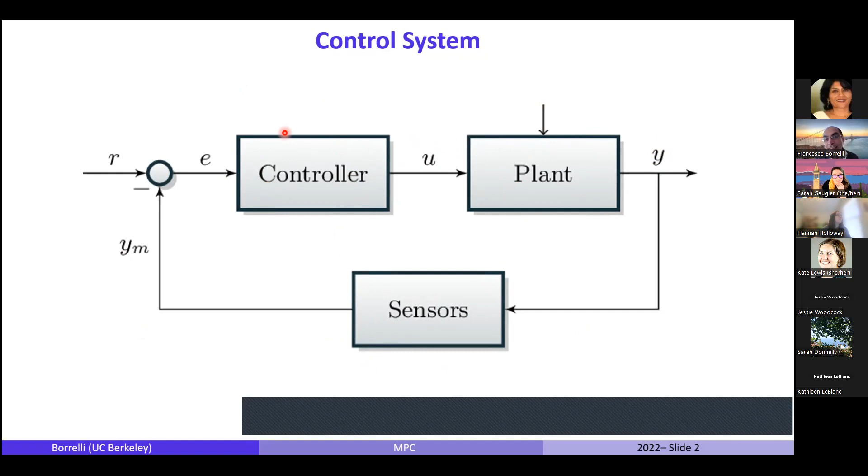And this is what I study. I study control, this block here, control systems. I study the software that helps control any plant. Okay, let's make a few examples. We'll keep this simple. This is your Nest thermostat. I don't know how many have a Nest thermostat.

In this case, the plant that you're trying to control is the temperature of your room. It's your room, your home, your office. And we know that at Berkeley, this controller doesn't work really well sometimes for your office. But if you have a Nest controller, this is the software in this device that will decide when to turn on and off the heating or the cooling system based on a temperature that you measure from your room.

Okay, so the controller here is the software that goes in your Nest thermostat. So it actually turns out that this object is a controller as well as a sensor, because there is a temperature sensor in a Nest thermostat.

Let's do another example. This is your rice cooker. And this was one of the Japanese ones, where they write AI, artificial intelligence, or fuzzy control. There's a fuzzy logic controller inside this device that makes sure that your rice is cooked to perfection. And so the controller here controls how much heating to provide inside the system, so how much to heat your rice.

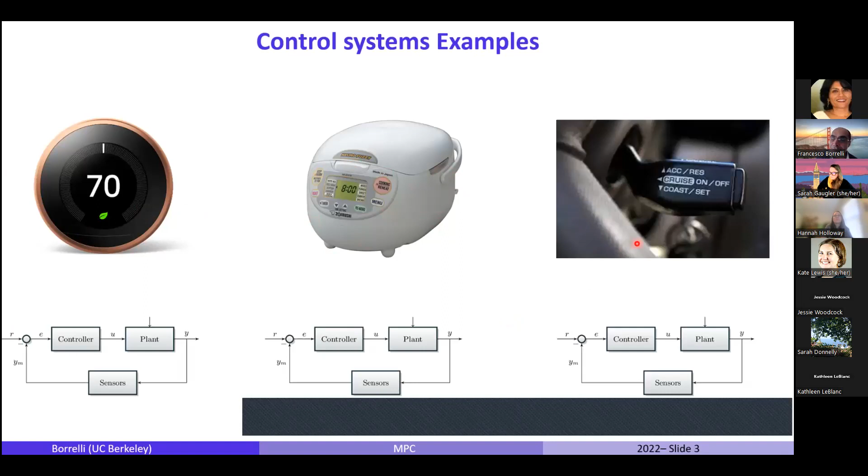Okay. So what is predictive control? This is like going to the future. The controllers before are pretty simple. You can buy this device. There's a logic, and you usually would not hire a graduate student. I cannot write a proposal on a rice cooking control system. But I studied predictive control, which is a control system that uses models to forecast what's happening in the future, and the forecast changes the behavior of the system.

So let's do an example again. This is our first experiment that worked on a self-driving car. You see I'm not touching the steering, and I'm not touching the pedals. If you're driving here, the controls are more complex. Why are they more complex? Because you need to predict what the other actors in the scene are doing. Is this car slowing down? Is there another car trying to cut in? Should you overtake or not? So the intelligence to control the vehicle needs to be predictive.

And so this is the type of technology that I developed in my lab, and we've been studying it for over 15 years. This is a Tesla. Elon Musk, almost when I started, hired 4 interns in the summer from my lab, and they ended up developing what is the Tesla autopilot today, based on these technologies. So I have a book we use when I write proposals.

When I write proposals, I usually write proposals about the theory of predictive control, and also how to write the algorithms that run on these devices, and theory to validate these algorithms. So what I want to talk to you about today: I've been doing this for a long time, and our lab has been quite successful in a number of applications. Solar: around 60% of solar power plants around the world run using the algorithms that we have developed. So those are predictive control algorithms.

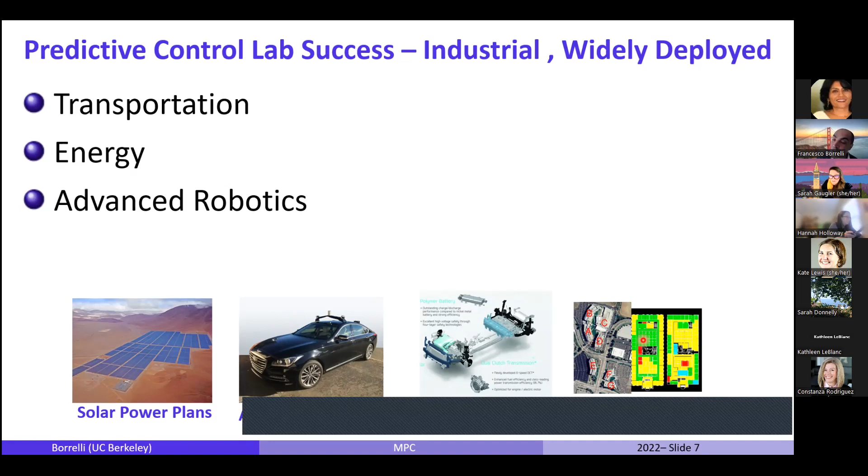A lot of work in the automotive field, and even also in heating, ventilation, air conditioning, because by using forecast information about the weather, you can keep people comfortable and use less energy. So today I'm going to focus on cars, because it's fun, and it's one of my big areas of expertise. But really what the lab does is to use this artificial intelligence, or this predictive control system, for a safer and more sustainable world. So reducing emissions, saving lives. It's really the motto of our lab.

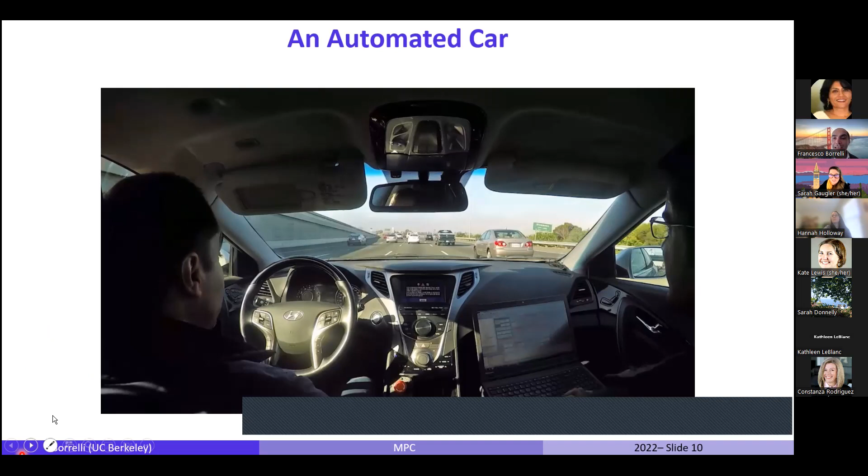So let's focus on self-driving cars. If you go to San Francisco, you'll see a lot of them trying to learn to drive around. And I already told you about these experiments. The reason why everybody's pushing for self-driving cars is really the number of people that die every year. In the United States, around 40,000 people die, and this number actually went down during COVID, and now it's up again. Probably this year we're going to hit 50,000 people dead from car accidents.

Around 3 million people injured. Some of these are really bad injuries, in the United States and around the world. So if you put all these numbers around the world, this would be roughly like a Boeing 747 falling from the sky every day. So imagine every day you have the news that an airplane fell from the sky. So this is really how bad this is. It's just that we are used to this idea that people just die in car accidents, and we do not pay a lot of attention.

There's another reason why we want to do this: human drivers in general are bad drivers because they don't know what the effect on their emissions is when they use their pedal. So you can actually go slower, you can go smoother, you can be smarter about the route that you take, so that you have less CO2 emission and less energy consumption if you have an electric car. There's also another reason. When I teach this class on vehicle dynamics, especially the young students, they take Uber, they do not like to drive. And so there is this trend where mobility is now a mix of public transportation, especially in Europe, and shared mobility like Uber or Lyft.

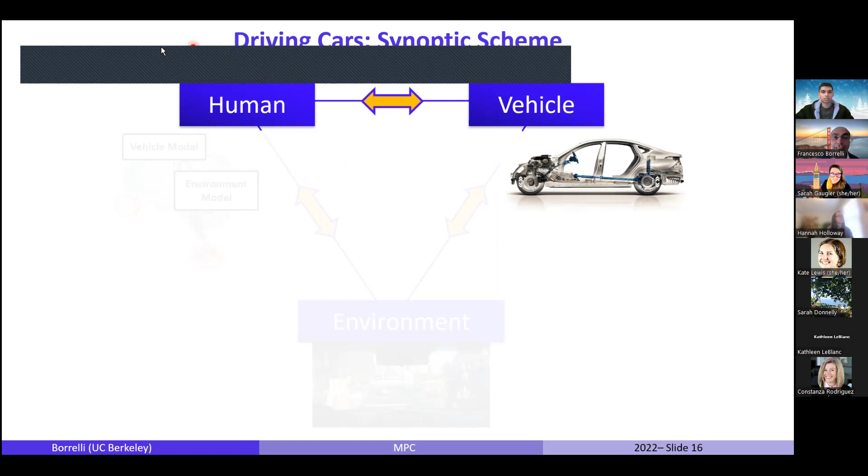So when I teach how the driving experience works to my students, I show them this loop, because again, some of them have never driven a vehicle. So I have to tell them the human interacts with this object, which is called a car. And the way you interact is, first of all, through a set of devices, which are pedals, accelerator and braking pedals, and the steering wheel. So by moving steering wheels and pedals, you do something to the vehicle.

And today in modern cars, these objects are like joysticks. They're not connected to anything physical. The accelerator will send signals to your engine. The pedal will send signals to your braking system. The steering will send a signal to the motor that changes the wheels of the car. So it's all digital interfaces. There's no direct connection. It's just a signal sent to the motor that says speed up, increase the speed of your wheels.

So that's what is called an actuation system. But you're not aware of this. You just control these three elements with your limbs. And if you are in Europe, you have an additional element, which is your gear.

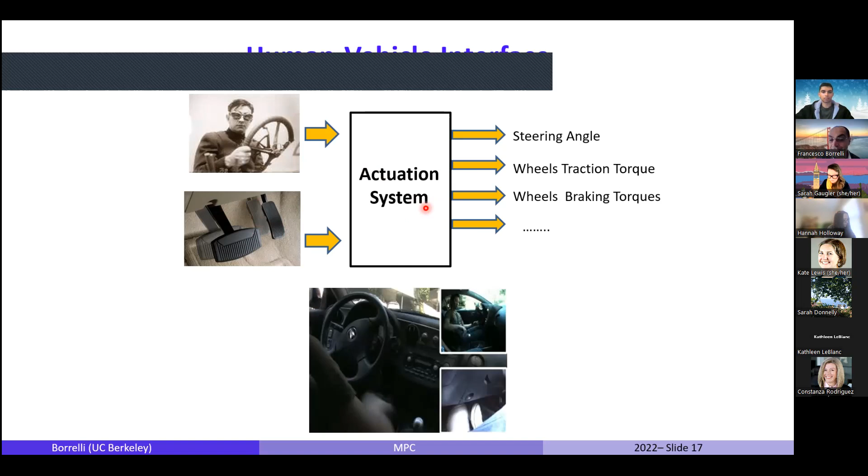Now, the low-level control system, what's happening at the low level, is some of the things that we study. We are car experts, and so we study, if you push the brake, what will happen. There is this object that changes the pressure inside. This is called a hydraulic brake circuit. These are super complex systems. And as you change the pressure in here, there is this disc that pushes, and like a clamp clips on, these are called disc brakes, and your wheel will start stopping. So we study what is called the low-level control system, the braking system, or the engine system.

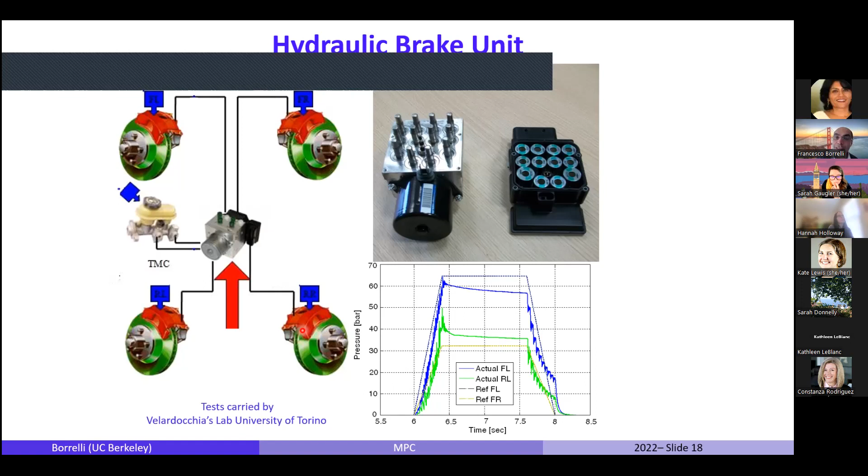Now, in one of the cars we have in the lab, you can control the brake at each of the four wheels. Imagine a human has only one braking pedal. Imagine having four braking pedals. Why do you want to brake each wheel differently? Because this will give you a different behavior of the vehicle, which can be safer. Maybe you want to brake more the rear wheel and less the front wheel. Maybe you want to brake more on one side so you can swerve around an object. So imagine now having access to four braking torques.

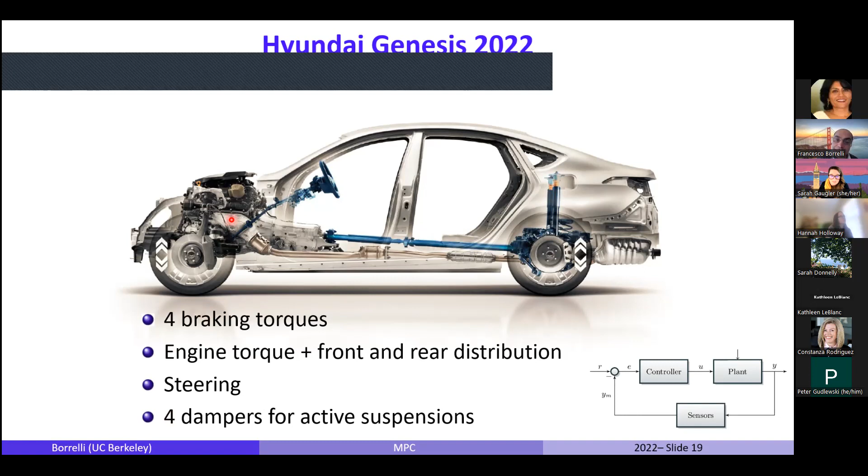Imagine trying to decide the engine torque, but now you can decide how much torque, how much power you want in the front and the rear. Of course, you control the steering angle, and we control also the suspension. So it's a complex control system. The plant is the vehicle. The software that goes in here is what we design, and it controls all these elements in real time. Every millisecond, we change the system by deciding these values.

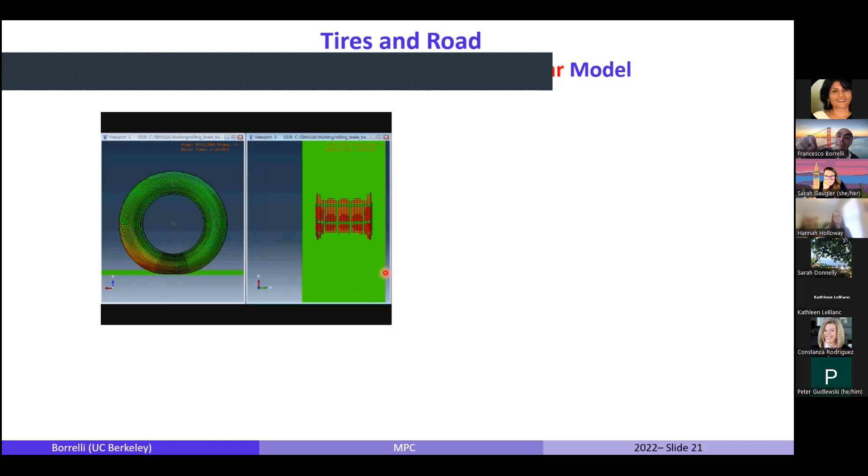So now the controlled vehicle moves in an environment, and the vehicle is a car. So imagine a box moving in this environment; it interacts with the environment in three dimensions. One dimension is with the ground, and these are the tires. We study tire models. They are very complex objects. It's called a viscoelastic material. You actually can stretch these tires if you have a lot of force, and a vehicle definitely will be able to stretch these tires. So we do simulation of these tires, and we understand what happens to the friction when you go on asphalt or snow and ice.

For instance, Cruise and Waymo, which is the company from Google, are still not able to drive on ice or on snow. It's very hard because you have less friction. So we are going to help them drive on ice and on snow.

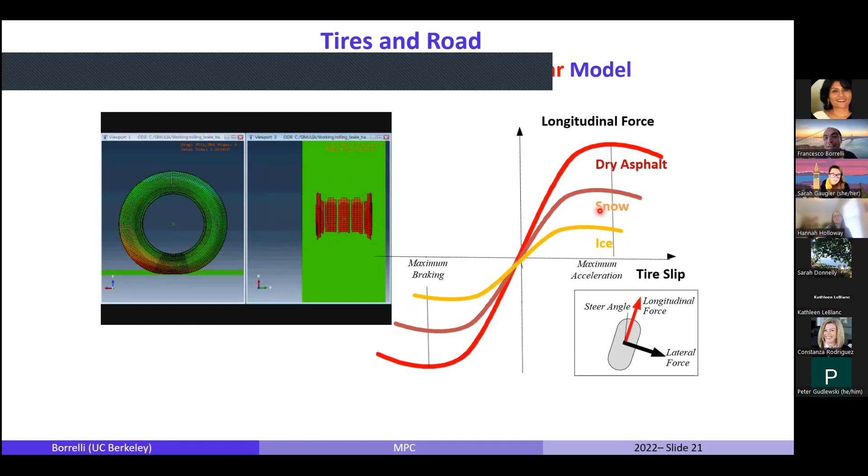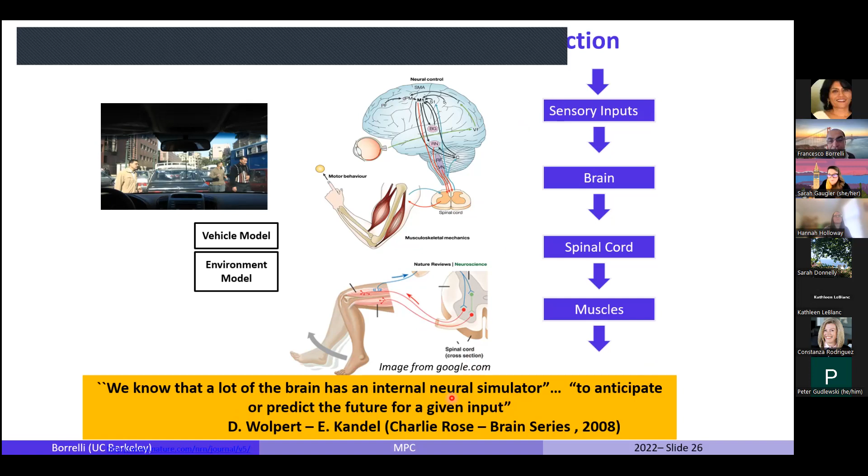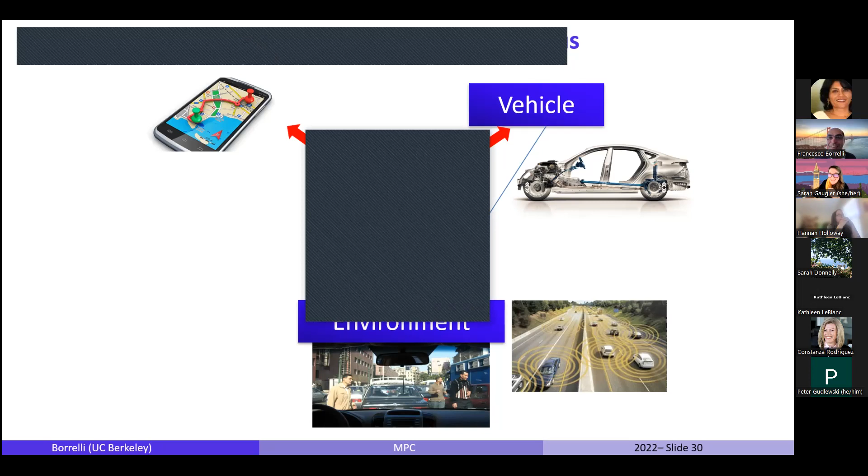And so again, it's why it's hard and why we are not there yet, because with this controller, it's hard to write the software that is able to understand everything, not only to predict what's happening in the environment, but to act on the vehicle so that you're safe.

So let me show you, let's see how much time we have. It's 10 minutes.

Just to give you a little bit on what is the main idea and how we use that on other systems, including food. I don't think I have many slides on food though. So the idea is simple. I have a model, a mathematical model of the object. I compute an action, I use this model to predict, and then I act on the system. I take some measurement and I keep the process of computing, predicting, acting. Computing, predicting, acting. So the challenge is really how to make this really fast, at the same speed that our brain works.

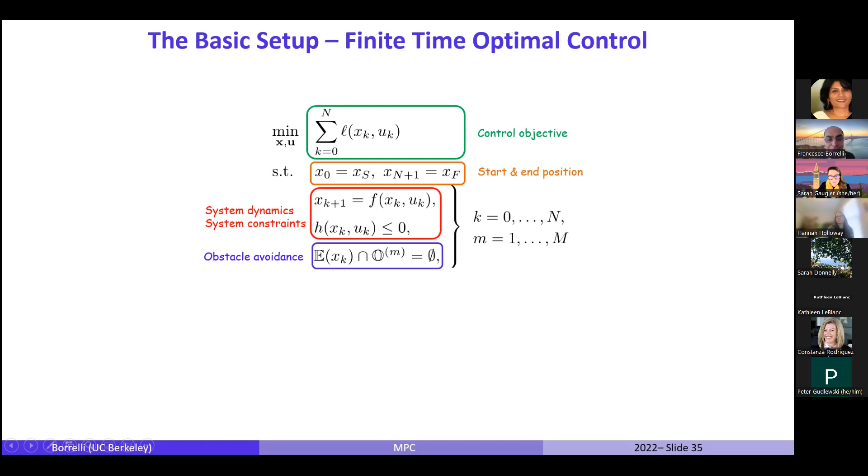So this is the only mathematics I'm going to show today, but when I write a problem, I'll say, well, there is something in it that our controller wants to minimize. This is my control objective. I want to push the ball very far. Okay, there's a start position, the end position of the ball, and then there's the motion model, the dynamics, and this is where the hard mathematics comes in.

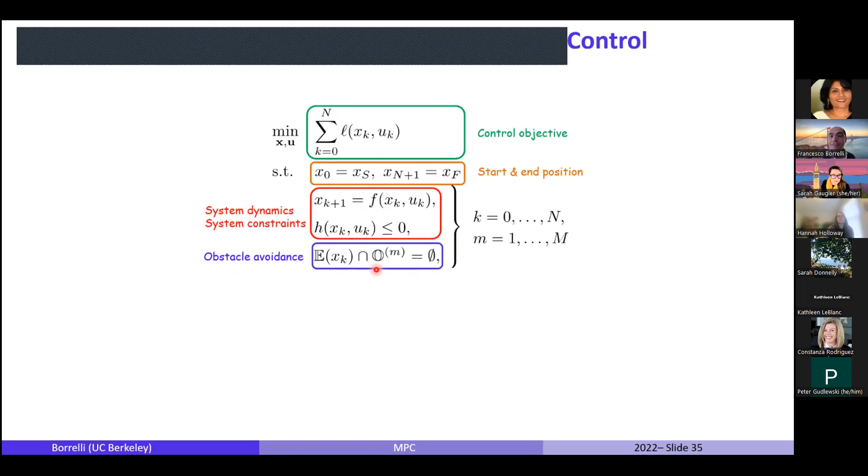How do you describe the motion of a vehicle? How do I describe that the vehicle needs to avoid obstacles? So this is all the math that goes in here. That's what we study, and each problem is different. If you're driving on ice, you want to care about the vehicle dynamics, the low friction. If you're parking, you want to care a lot about the obstacles around you. If you're driving at very high speed on the highway, you want to care about the other vehicles cutting in front of you and which lane you should take.

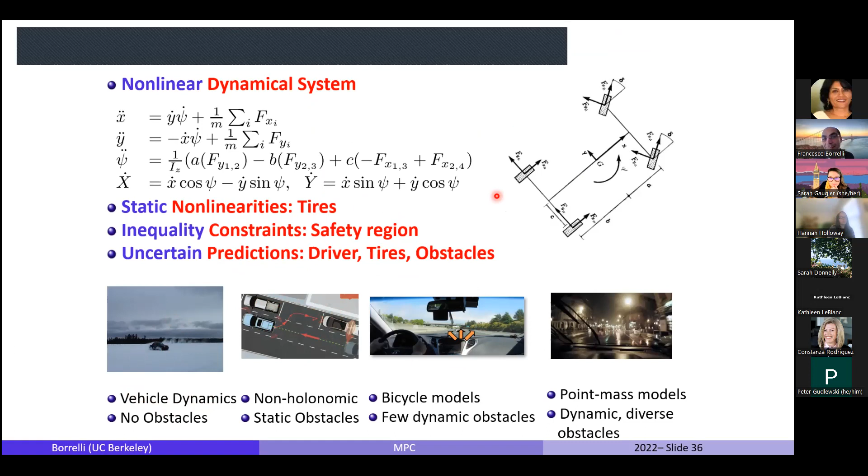Okay, so that's really the math, when we write proposals, that is behind the predictive control system. And let me show you, for instance, a very simple parking example. We can do this. The parking code, the predictive control, looks like this. It's 1, 2, 3, 4, 5, 6, 7, 8, 9, 10 lines of code.

Seems very simple, but in this obstacle avoidance element here, for instance, there's a lot of math that goes into understanding it and actually writing it. We came up with this formulation only 5 years ago. Before that, it was not clear how to solve a parking control problem autonomously. Humans are pretty good at it. Actually, not. This is a video that shows you that sometimes it can be really hard.

This is the minute count: it took this person 6 minutes to get out and solve this problem, right? So if you use automated autonomous parking, and there are some cars coming out now with it, Tesla already has Summon parking, but this would be very hard to solve for Tesla too. If you use our algorithms, you will see that in exactly the same scene, we reconstructed the scene, the best action using a predictive controller would be this one here, and that's how you get out of the parking in a few seconds instead of 6 minutes.

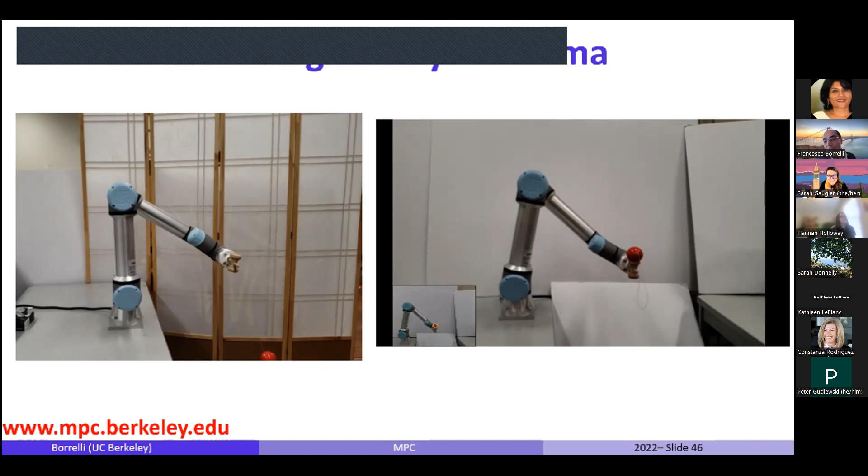So we have been very popular. Here's an example; I'm not going to play this. Our lab has been popular with this experiment. It became very popular last year because Google DeepMind was trying to solve the same problem using artificial intelligence without using predictive control. And this is Professor Ben Recht at an AI conference telling how badly the Google DeepMind controller was working, and how elegant our solution was.

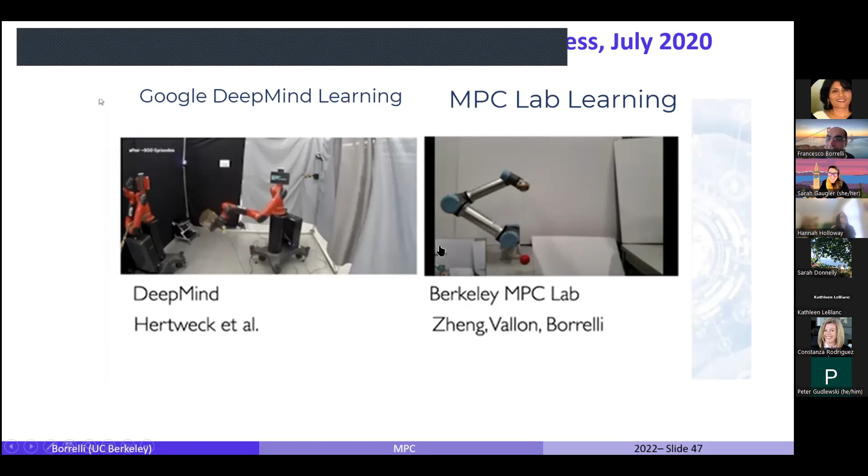I will stop here. We have a lot of learning experiments. In one ONR project, Office of Naval Research, we wanted to learn to drive a vehicle at very high speed. This could be very useful, for instance, in rescue missions. And students had a lot of fun. This is a vehicle driving over a circle, first very slowly.

You hear the wheels screeching here. It means you're going at the limit. You can imagine students have lots of fun here. And again, this controller is learning to drive faster and faster, which is very important for our Department of Defense. So what am I writing proposals on?

Our community believes that the single vehicle, single robot research will happen. And so we always look ahead at what will happen in 20 years. And really the question is about what will happen when these robots will be everywhere. What happens when I'm going to have a million self-driving cars, or you can buy a robot? And so the latest research is really about learning co-robots, collaborative robotics.

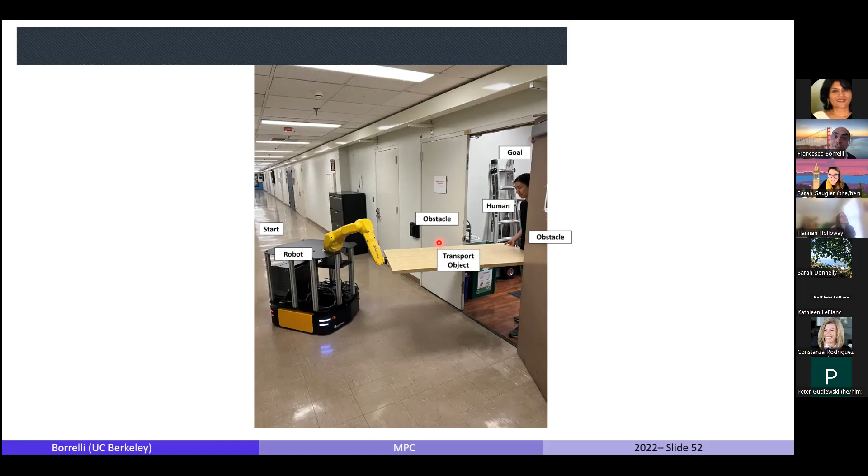The other research is on multi-vehicles. What will happen when many self-driving cars will be around, will interact with human-driven vehicles, and you will be able to talk to parking lot infrastructure, be able to have Google calendars of your workplace? What will happen in this connected world where vehicles are autonomous? And so, just to complete, we have a big experiment with ARPA-E where we're trying to redefine the mobility control system, the intelligence when these vehicles will be automated.

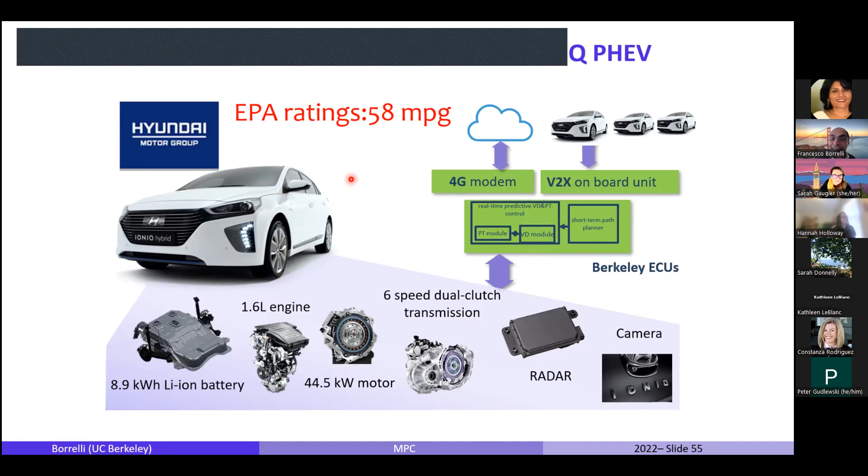And so we have around five cars at Richmond Field Station. They talk to each other. And we try to control these vehicles so that the driving experience is safer and that you reduce energy consumption. So we actually instrument these cars with fuel sensors. This is a hybrid car, so it uses both fuel and electricity. And we try to measure energy consumption and reduce energy consumption of this vehicle.

This is our last one, and that will be my last video. This is an experiment that we did 2 years ago. During COVID, we had to stop all our experiments in Arcadia. It's close to Los Angeles. What you see here is 3 vehicles. They're driving autonomously, and they're talking to the traffic light. The traffic light is saying, I am red, but I'll become green in 5 seconds. So the 3 vehicles, it's called a micro platoon, they'll start smoothly. You see the human driver probably was distracted with the phone.

Instead, the vehicles here are not distracted. They will look at the environment. They'll sense there is a truck here, so they'll decide when it's safer to change lane based on the tracking of speed. So this is a real demonstration. These are in a real city, with real humans, and these 3 cars are 3 cars from the lab that have been controlled by our predictive software.